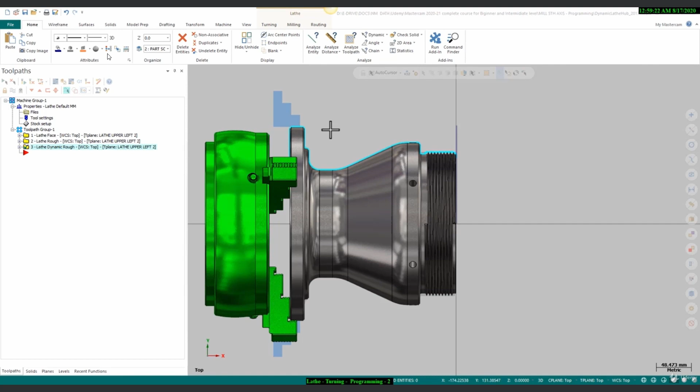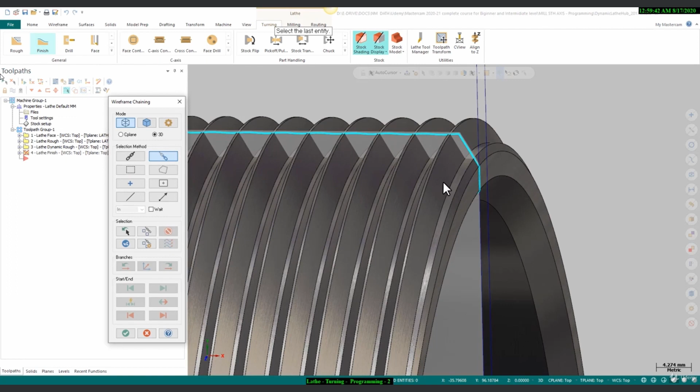So now I will show you how we can create finishing toolpath for the OD turning. Go to the turning toolpath and here I will show you the finishing option. So select on that and then select the curve. This is the start curve. Sorry, we will select this curve and change the direction. We have to go that side from this face, top view, and this is the last curve. Perfect, and then say OK.

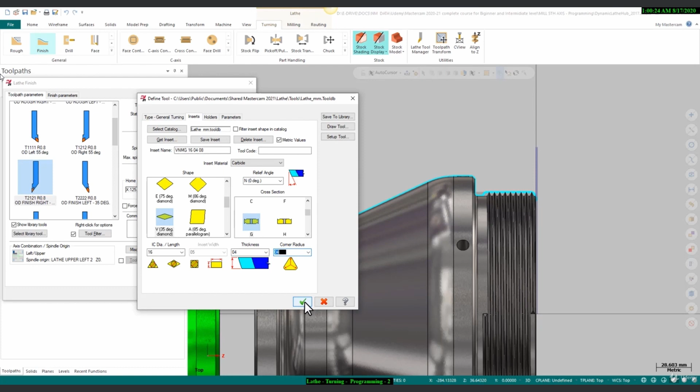So now I will use a different kind of tool, this type of tool, so we can create a finishing toolpath in one shot for all this area. So I will use VNMG insert. I will show you which insert I am using, that is VNMG 1604.8. So I will use 0.4 corner radius insert, and here I will select the tool number, feed rate 0.05 and RPM 500 to 1000, and I will use CSS. Finish parameter, I will give finish step over only one pass.

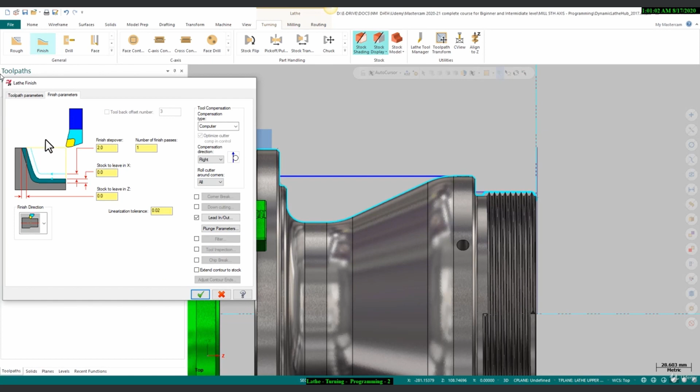Okay, so you can see now it is creating straight passes, right? Because we forgot to activate the plunge parameter method. Plunge parameter, activate this method. Okay, and then say regenerate. So it will create all the passes in one shot. So you can see this is the complete finishing toolpath with VNMG 1604.4 insert. So you can see how easily we can create the programs.

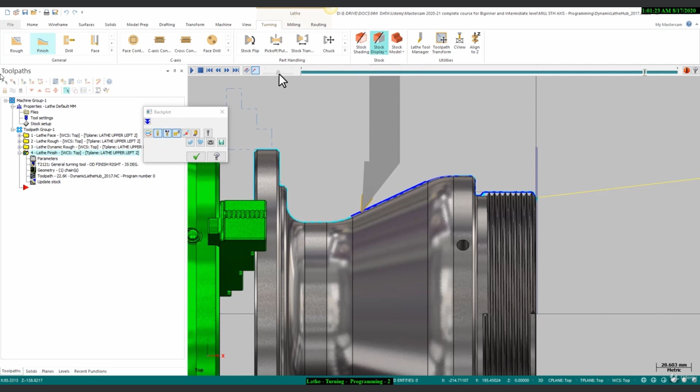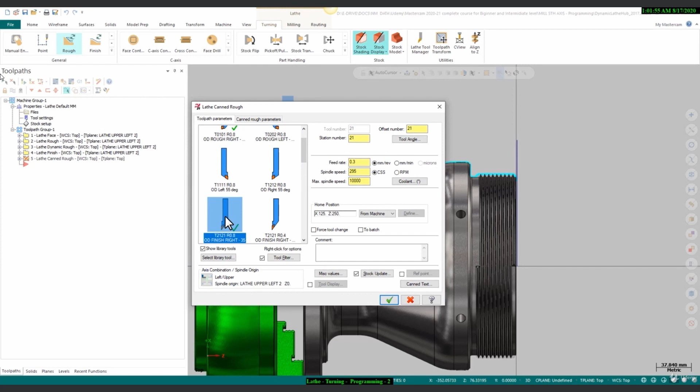Also you can use dynamic canned cycles. This is general cycle, so this is a non-editable program. If you need an editable program, then you can use canned cycle. So I will show you that also. I will select that rough. This is for canned cycle, right? I will select the last wireframe and then say OK. I will use the same tool. I will give the canned rough parameter 1 mm of clearance in X, 1 mm of clearance in Z, depth 1 mm, and then say OK. So it will create a simple passes toolpath.

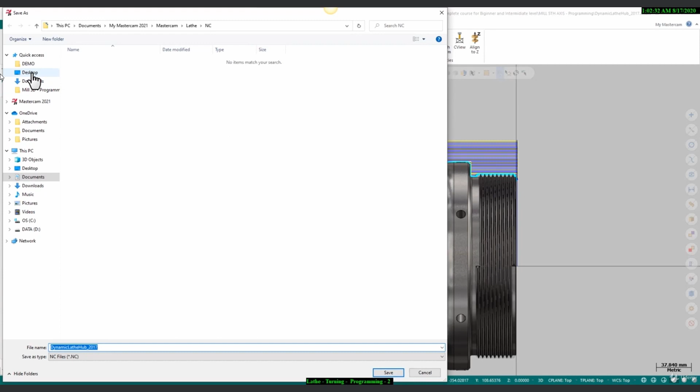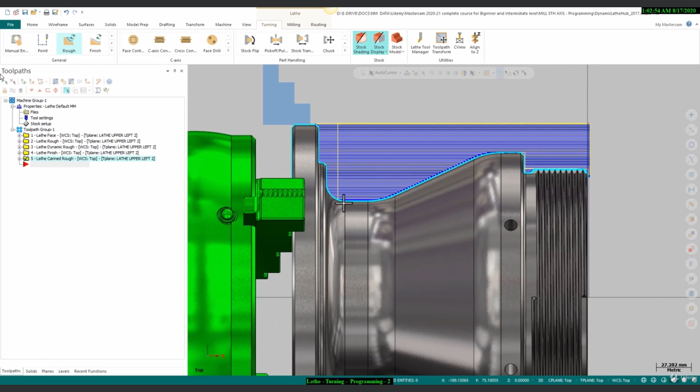If you use this program, you will be able to edit the cycle, because it will give the output in G71, G73, G76. I will show you the output. If you need G code, you can click here G1. I will select ask. Now I will post that on desktop and then say OK. So you will get the G code. Let's check it. So you can see this is the canned cycle. It is giving some errors. We will check that. I think we are using default post processor, so I will change the post processor. It is lathe default mm, so it is also okay.

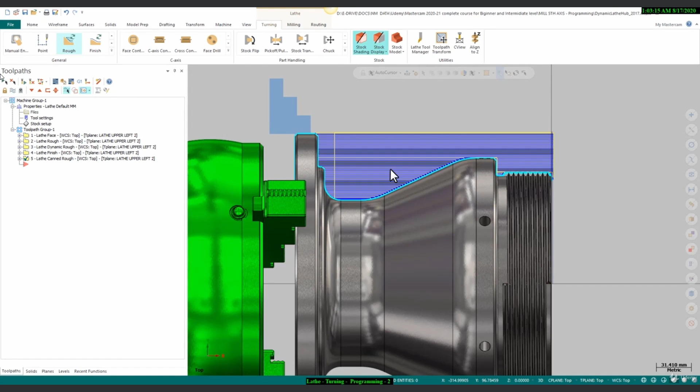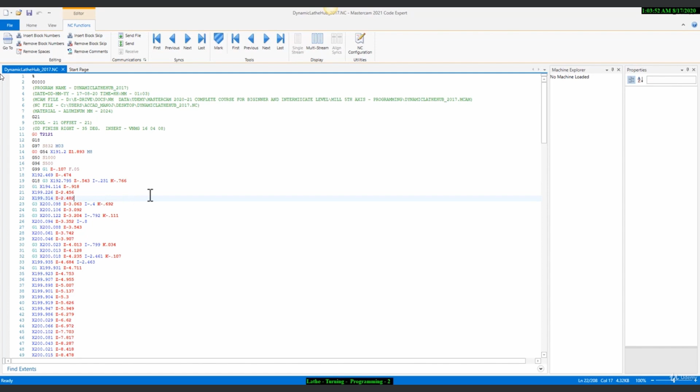Okay, so let's try this toolpath. We will click on the G1 and then say alright. So you can see code has been generated, but it is in canned cycle. You will get lengthy programs. It is non-editable, but you can use that. It will not give you any error. You can use this program also. So there are multiple options available. If you have to create a group program for this area, you can create that. So I will show you the final finishing toolpath. I will delete this canned cycle.

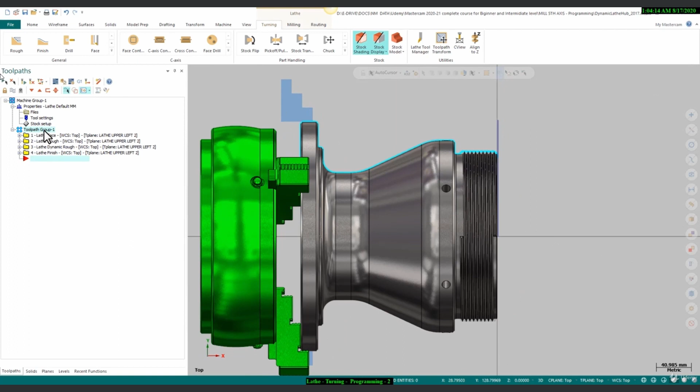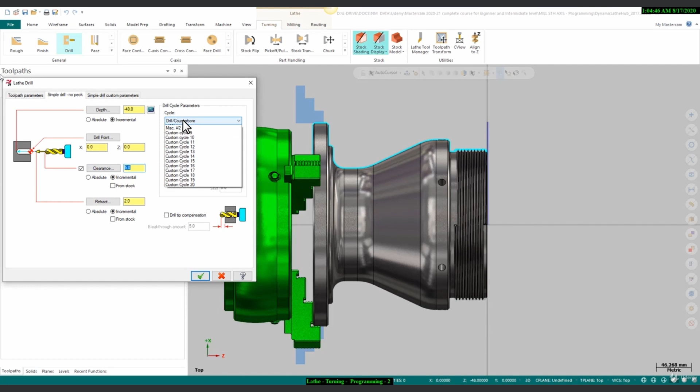I will select this, and one more thing I will show you, that is drilling. So I will click on this drill. Suppose we have to use this tool, 40 mm dia. So I will select that. I will give the feed rate, RPM and tool number. Here you can give the depth. I will give depth only 48 mm and drill point x0 z0, clearance 5 mm. I will use peck drilling, with 2 mm depth of cut, and then say OK. So you can see we have created the drilling program also. I will play that. So this is the drilling program. Easily you can create that.

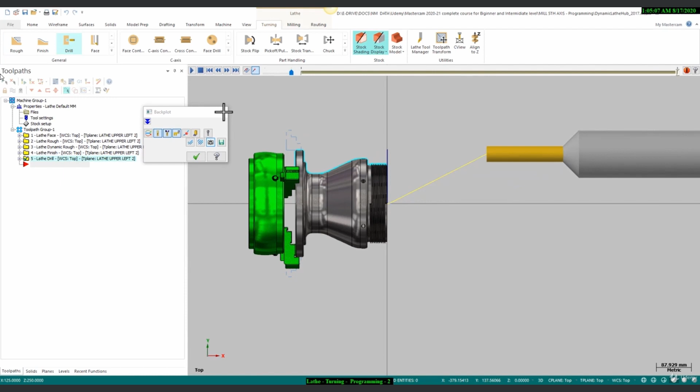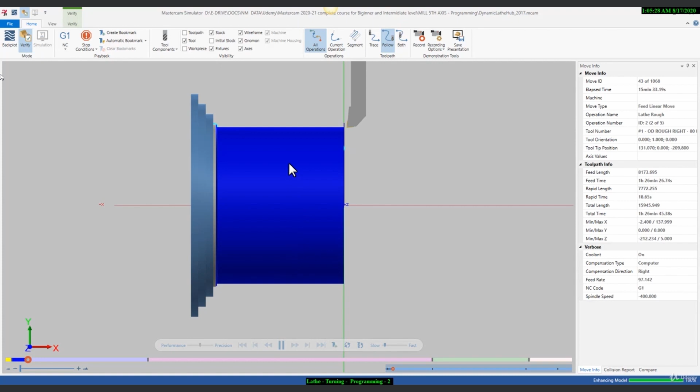Perfect. So now I will show you the simulation. Verify. It's processing. I will make it slower and then say play. So this is dynamic roughing, and the last one is for finishing. This is drilling toolpath. So we have covered facing toolpath, OD turning toolpath, OD finishing toolpath, OD dynamic roughing toolpath and the drilling toolpath.